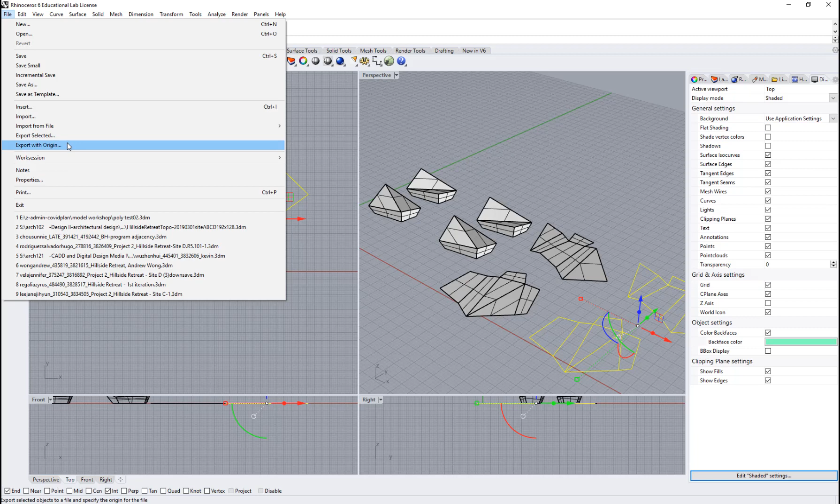I'm going to take all of these objects that I want to make into line drawings, and then export these into AutoCAD. So, export selected, AutoCAD drawings, AutoCAD DWG. I'm going to name this poly test 1, and it's going to go into my workshop file.

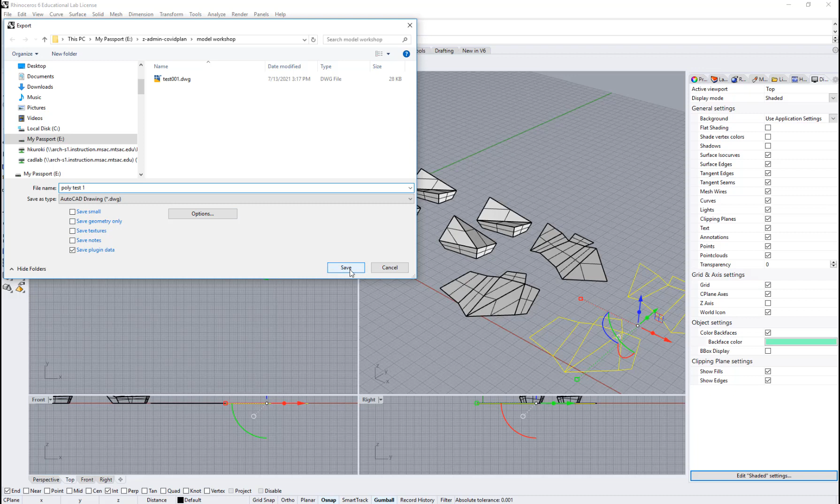Looks like everything is okay, so save. Since this is all line work anyway, I'm going to keep it as line work. We could make it into polylines and other stuff, but we don't need that for this one. We just need to keep it as a simple line. There's no curves or anything on here, so a line will work just enough.

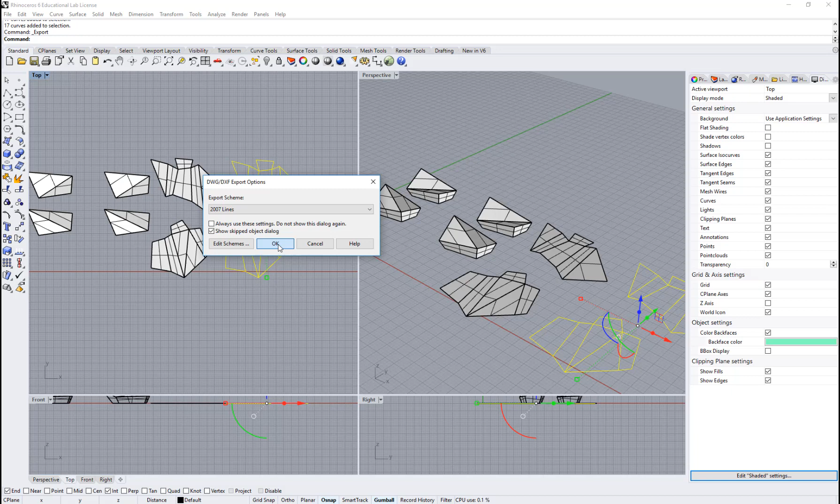That should have saved it to my poly test 1 file. There it is. So if I try to open this up using AutoCAD, zoom extents, there it is.

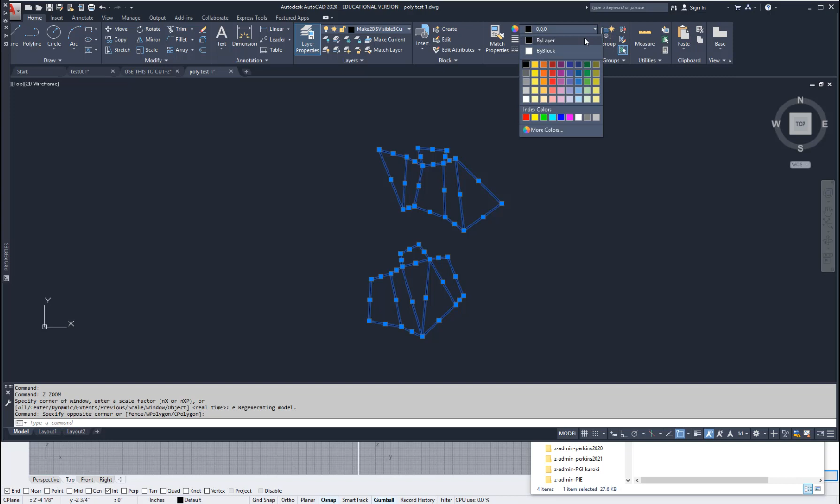First thing we do when we get into AutoCAD, since this was made in different software, all the colors, lines, and line types might be messed up. I'm going to select it, and since 000 may not show in AutoCAD, we're going to go by layer and turn it into layer 0 for now.

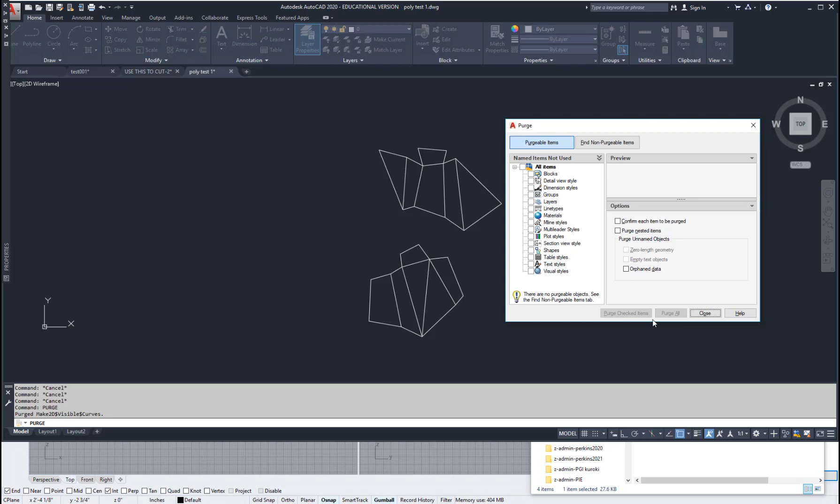Second thing, purge, because I have layers and colors in here that I may or may not want. I'm going to purge the file, and since I'm lazy, I'm not going to confirm each item. Purge all, and since we don't have much stuff, it's done.

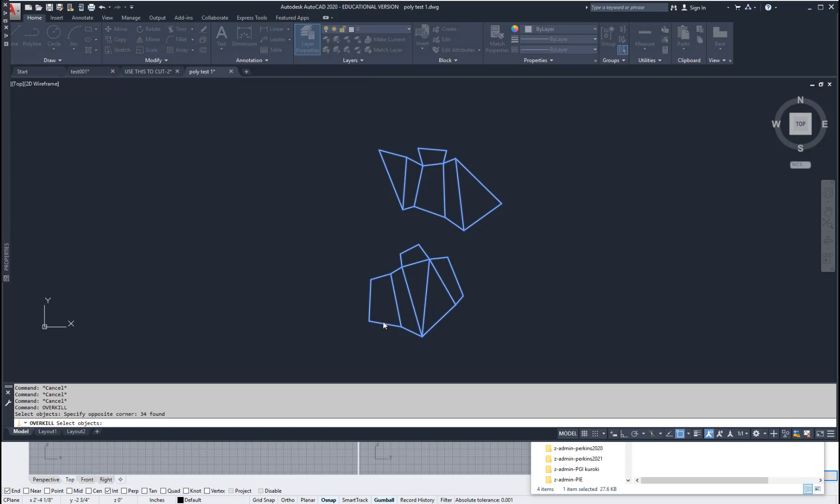Once I am in AutoCAD, I'm going to create layers. Don't forget to overkill these selected objects. With this one I don't really need to do anything because I know there's no overlapping lines, but do it anyway. Optimize segments within polylines, sure. Combine collinear where it overlaps, yes. Combine collinear when aligned end to end - right now I don't want that because some of these I want separate, so I'll connect them up later manually. Maintain associative object, that's fine, and there it is.

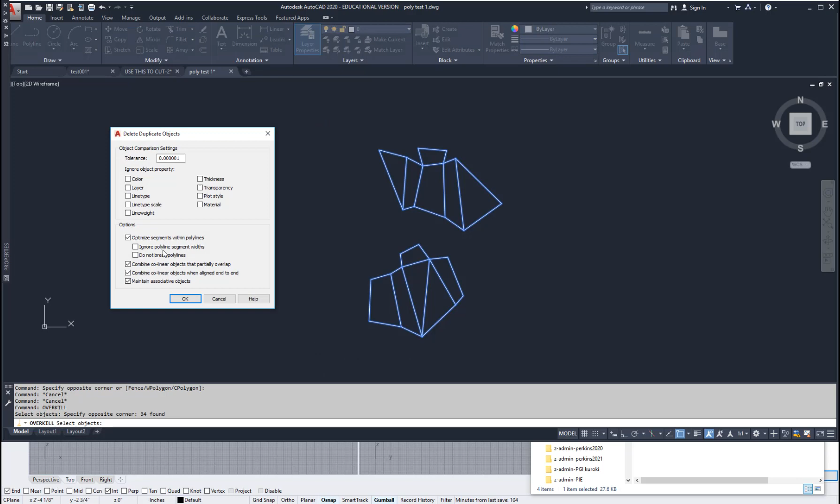That should have overkilled everything. Remember to change everything to a known layer and color, and purge the files so there's no extra remnants from the Rhino file in there. And this is all we have.

So from here, what we're going to do is create our own layers. Create a layer, and we'll name this one cut. Create another layer, we'll name this score. Those two are it. We're going to have to set these colors. For the score on our machine, it is going to take yellow - not one of the other AutoCAD color yellows, the index color. We're going to use color 2, yellow.

Let me see that again, because the score - whoops, I think I made a mistake. At Carpe Diem, the cut color is yellow and the score is red. But on our machine, we will take red as the cut color and yellow as the score color.

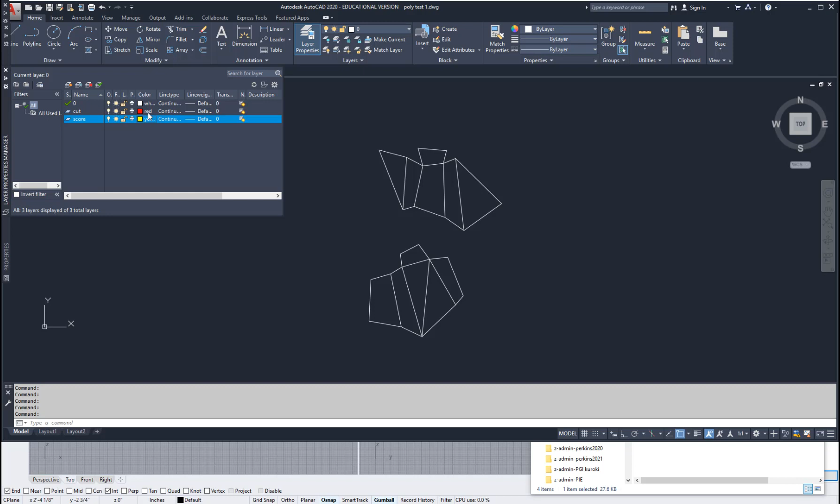So please make 2 layers called cut and score. Set the cut layer to red, color 1 - not any of the 10s and 15s and other colors that look like red, but one of the first 7 colors in the color index, red. The score is yellow, color 2. This is very important - if you set it to any other color, it will not cut.

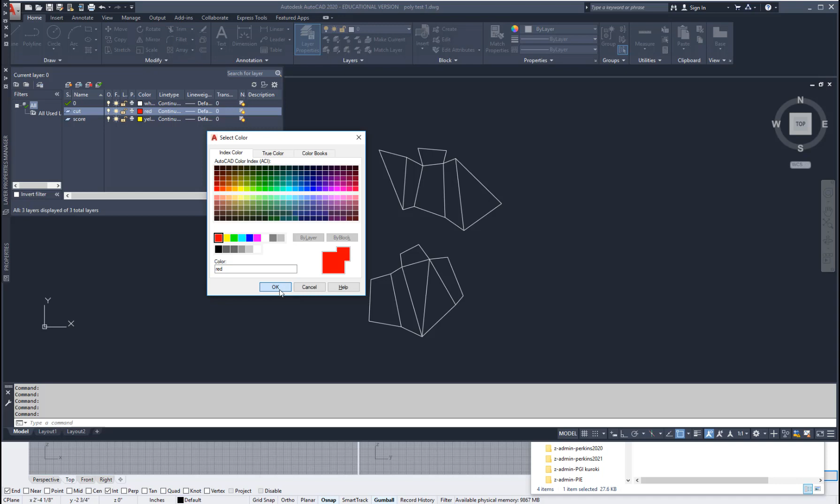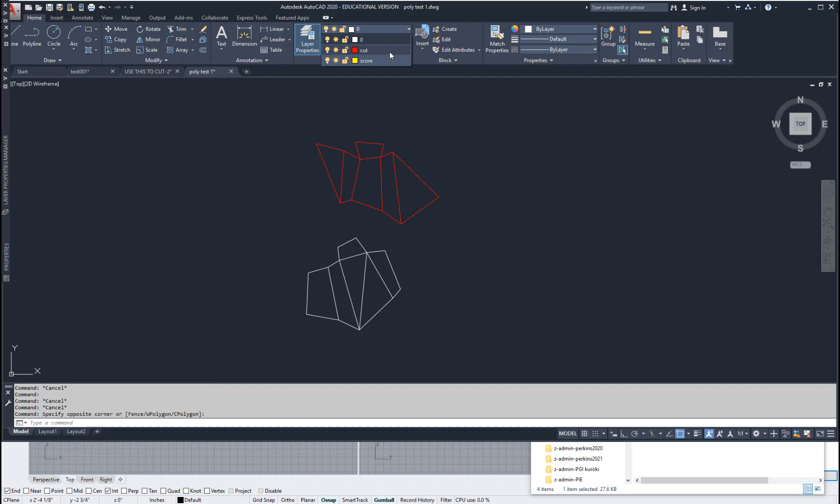So there it is, we know that these lines in the middle are the scores. What we can do is try to be quick about it. If we have lots of score colors or cut elements, it helps to turn this all into the cut layer first and select it all as one object - fast, quick way. Then select the interior parts and select that as the score. It's the least amount of movement I can make.

Now I might try to join some of these polylines together. So p-edit, this one will ask do you want it to turn into one, and I'll say yes. Then I'm going to join, select that, with that, with that, with that, and that. If I do that, it should just be one object, and when the laser cutter goes, it'll just zip right along this entire object.

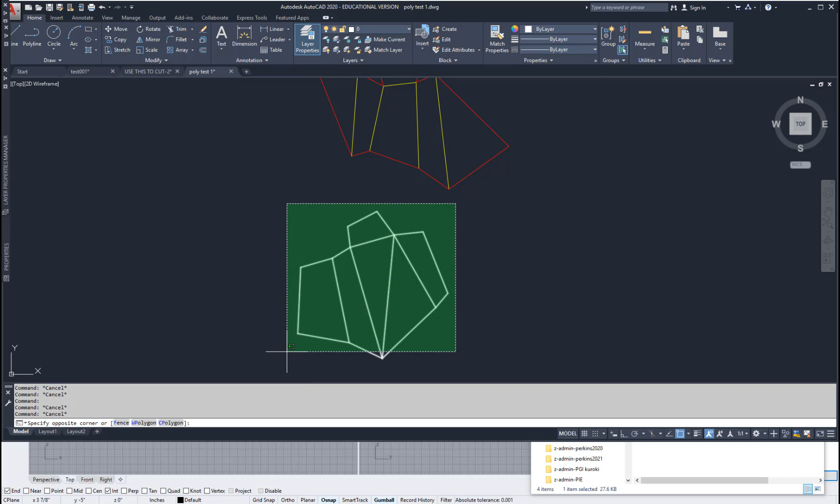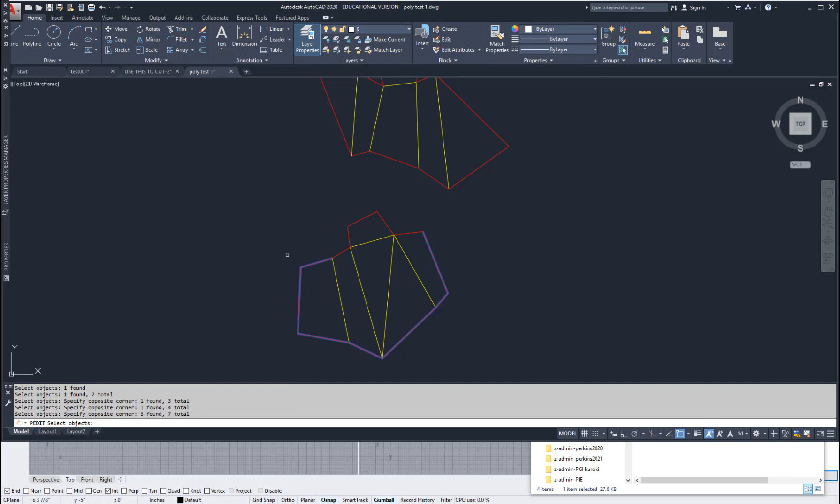Same with this one - I'm going to select everything, turn it to the cut layer, and since the middle part only needs to be the score, I'll set that as score. Again, I'm going to take all the perimeter parts and join them together. P-edit - I know you can just join, but for some reason, if you turn it into a polyline first, then join everything else, it tends to work better.

And there she is - that's really the line prep for putting it through the laser cutter. There's this other step we want to make, which is tabs and nesting the cuts onto the board material that you have, and that would be next.